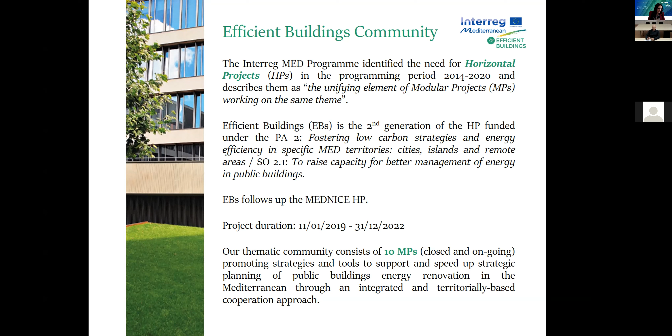Efficient Buildings Community follows up the MEDNICE horizontal project, the first generation of this type under the Interreg program. The duration of Efficient Buildings Community is from January 2019 until the end of 2022. Our thematic community consists of 10 modular projects, some closed and some ongoing, promoting strategies and tools to support and speed up strategic planning of public building energy renovation in the Mediterranean through an integrated and territorially based cooperation approach.

So what is our scope, what do we do in the Efficient Buildings Community? First, we support the communication activities and promotion of the modular projects in our community, the 10 projects mentioned before. We disseminate the modular project results on the theme of energy efficiency in public buildings. We organize events to create synergies among projects and identify opportunities. We increase the transferring and replication potential of results to other territories. We increase capacities of owners and managers of public buildings to design and implement better energy efficiency practices. Finally, we promote capitalization of the modular project results and our results at policy, national and EU level to influence public policies, taking into account the MED specificities.

Here you can see the Efficient Buildings Partnership and where you can find more information about our project. I was brief because it's more important to proceed with the presentations of our invited speakers.

So let me stop sharing my screen. Excuse me, my computer doesn't want to collaborate.

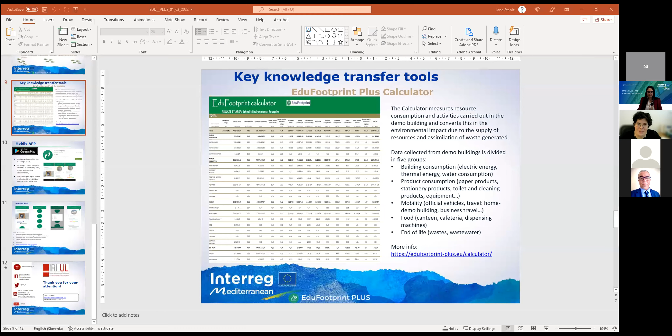We are also the energy management manager for University of Ljubljana buildings. This means we are trying to train the personnel towards being more energy efficient. We are monitoring the energy consumption of the buildings of Ljubljana University, which there are quite a lot of them. We're facilitating the energy information system, but most of all, we're trying to motivate end users to change habits in using energy.

In one of our previous projects, Mobistyle, we actually calculated how much energy we could save by using the stairs, not the elevator. So that was quite fun.

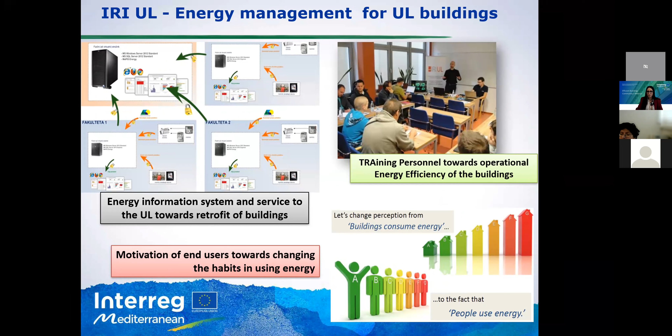But what we're trying to do is change the perception from buildings consume energy to the fact that actually people use energy. So we really need to focus on the people-faced approach.

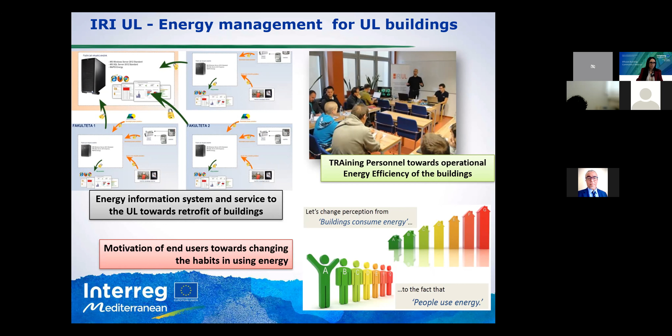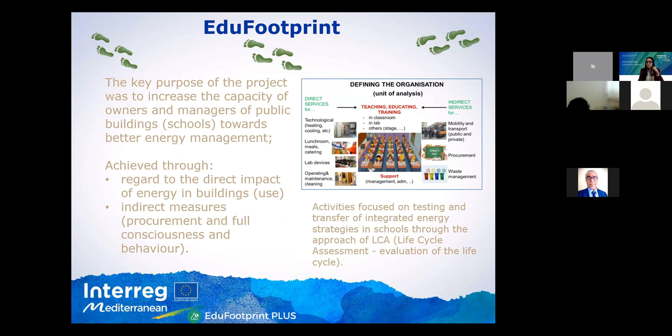In that light, we were first invited to the EduFootprint project, which was the original project. EduFootprint Plus's main aim is to transfer the tools and methodologies developed in the original EduFootprint project to new territories and new public buildings.

In the original EduFootprint project, we were focused mainly on school buildings. Now we are focusing on other public buildings, such as buildings for ministries, museums, kindergartens, or similar. The EduFootprint project intends to raise the capacity of owners and managers of public buildings and to promote low carbon footprints in schools and public buildings in the Mediterranean area.

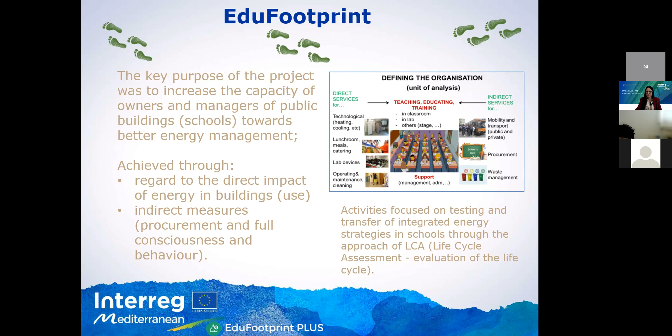Therefore, we are using different tools to do so. This is just a short scope on one of the measurements we took in the previous EduFootprint project.

The building in question is the new building for the University of Ljubljana chemistry faculty, and we could see how much the mobility or the energy consumption contributed to climate change. The pie chart shows CO2 kilograms and so on.

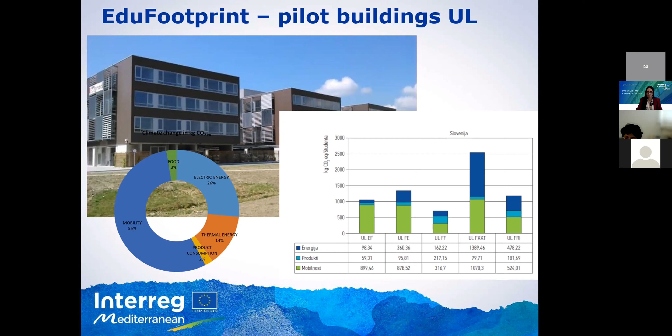However, because the results of the first EduFootprint project were so successful, we got funding for EduFootprint Plus, which transferred these results to new areas, such as Croatia, Bosnia and Herzegovina, Montenegro, and Albania.

Through the e-support system, we help them use the EduFootprint tools, such as the calculator and app. The receivers will, in kind, identify significant impact areas of public buildings and plan effective allocation of resources and time towards strategy, so as to decrease harm to the environment and people.

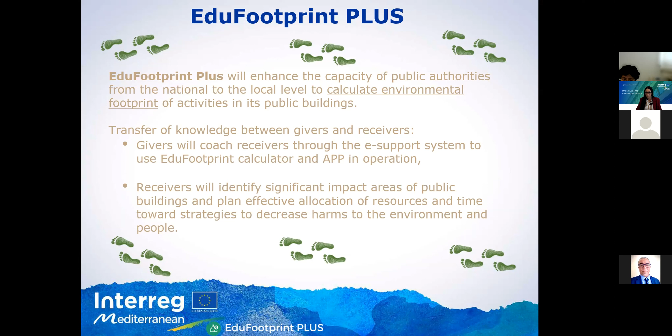Therefore, we created knowledge transfer tools, such as the calculator. The calculator is basically an Excel sheet, a tool to calculate the environmental footprint of public schools and public buildings.

The calculator covers energy consumption, product consumption, mobility, food, and waste. We input data like electric energy, thermal energy, water consumption, and electricity, including whether the electricity comes from nuclear plants, solar plants, or different types of plants.

The thermal energy is also similarly distributed, and the water consumption shows how much water is consumed by the building in general. We also pay attention to product consumption, such as paper products, stationery products, toilet paper, cleaning products, and so on. Everything is input in this calculator.

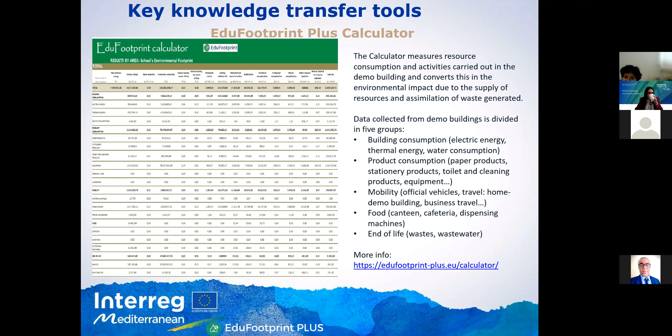For more information, you can access the web page in the presentation, and you can also download it and try it for yourself if you'd like.

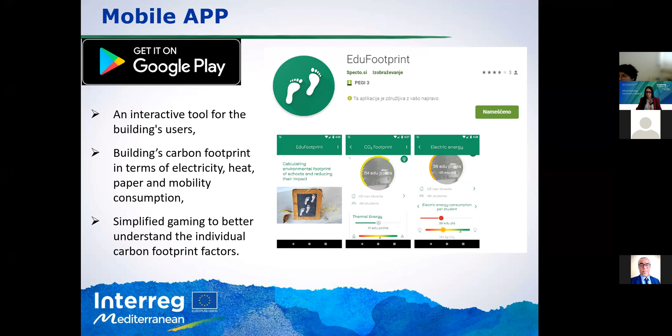However, the mobile app is an interactive tool for building users. It calculates the building's carbon footprint in terms of electricity, heat, paper, mobility, and so on. It also presents the so-called edu points, which you can play with by adjusting your carbon footprint data. So this is the mobile app.

It's available to download from the Google Play Store. However, at the moment it is limited to the EduFootprint Plus partners because we are still in the testing phase. But it should be available for the general public in the spring. So, what are the basic characteristics?

You have the basic data and logos about the EduFootprint project, the database about the demo buildings, and key CO2 footprint data. You also have the knowledge base, which includes all the static information and storytelling. And of course, you can play with EduFootprint, edu points, to decrease your building's CO2 footprint. You can find more information in the link provided.

And finally, there is the EduFootprint Plus webpage, where you can see all the tutorials about the project, the calculator, the mobile app, and very soon we'll also upload the EduKit.

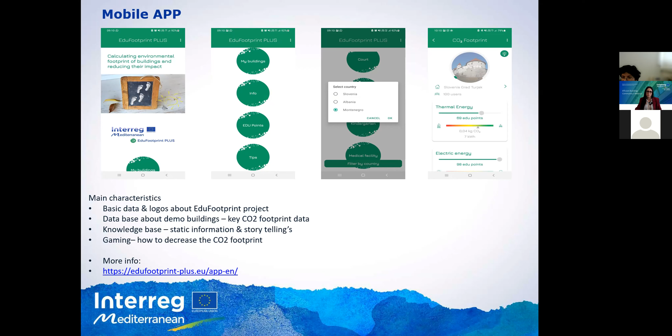This is very shortly a presentation about our project. However, if you have any other questions, please let me know. I'm available, so if you have anything else, please let me know. I'll stop there.

Thank you a lot, Jana, for this presentation. I have some questions, but I will keep them for the end of the webinar, which will have time also for questions from the audience.

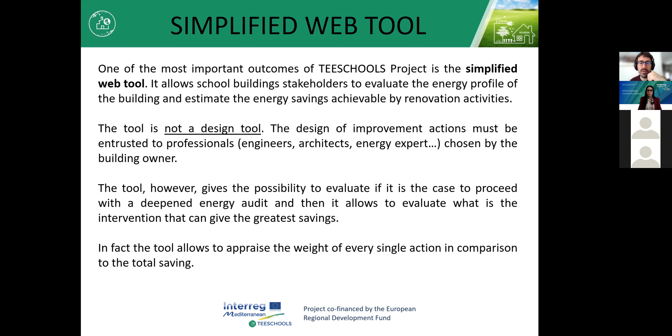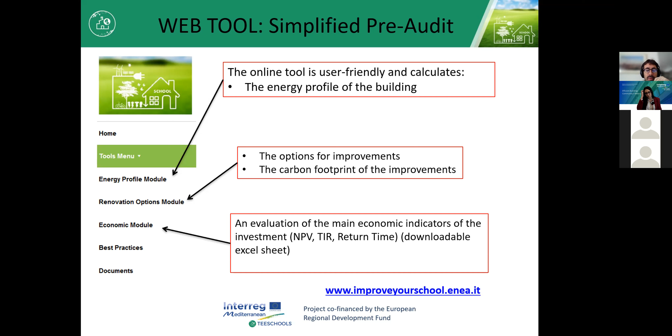Finally, the economic module gives an evaluation of the main economic indicators of the investment, so net present value, time of investment retirement, and so on. All this data can be downloaded in the format of PDF or Excel files.

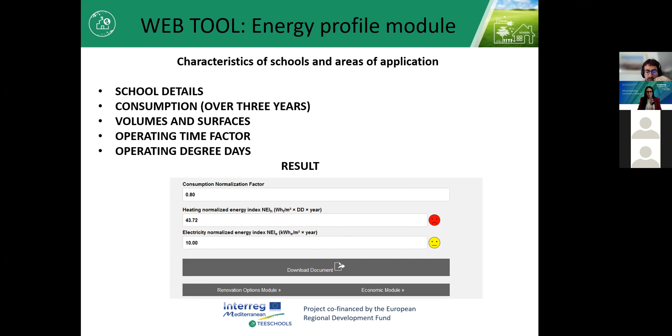Regarding the energy profile module, the user is asked to give as input the school details in terms of consumption over 3 years, volumes and surfaces, operating time factor, which is very important to assess energy consumption, and operating degree days, which take into account the location where the building is placed.

Finally, the total energy saved, in terms of both electric and thermal, can be achieved, as well as the CO2 equivalent savings and the school bus kilometers equivalent savings, in order to give the user an idea of what the renovation intervention has done.

The last module is the economic module, and it is given to the user in terms of an Excel file, where the main economic parameters can be seen, for example NPV, IRR, and so on, in order to calculate how many years of exercise are necessary to recover the investment done for the energy retrofit, basically.

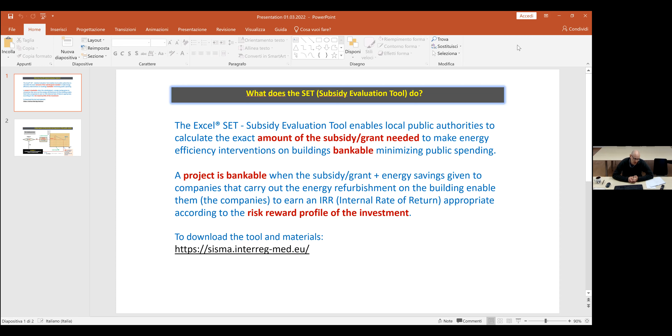So first of all, they said, okay, it was about 6 months ago, so the percentage is rather low. Why? Because the internal rate of return that banks owning ESCOs or companies usually want obviously depends on the risk reward profile of the investment.

What does this mean? That if you win a tender with a public authority and you know how to do your job and you do it well, it's not like working on the market where you have other kinds of risks. So obviously, the risks are far much lower than the average risk a company can incur when it has to operate on a market where maybe your clients may not pay you, the market can go up, can go down. So obviously, the risk is lower.

So let's say that on a basic standard approach, what do we say? Okay, these kinds of operations, these kinds of investments require at least 15, 20 years of savings that have to be given to the company. Okay, so let's say a public-private partnership, besides the grant, obviously, on top of the grant.

So the interesting thing is, considering that the risk is really low, what we can do is basically consider the average interest rate on public debt, on bonds that citizens own. Citizens finance their country by buying long-term bonds, which have an interest rate that's obviously very, very low. Like in Italy, it used to be around 0%.

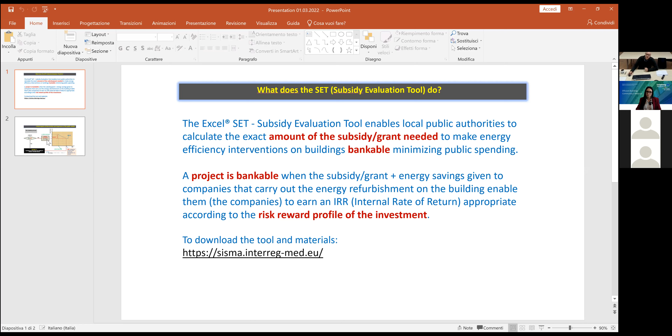Okay, so this is a scheme, and then we'll go through the Excel file, but just to give you a general idea. The subsidy process basically is: once we've worked out what the minimum internal rate of return required by the market is - generally what governmental bonds yield plus 3.5% - when you add a couple of phone calls, that's how you get to know it, how you fix it, and you say it's about 4.5%, 5%.

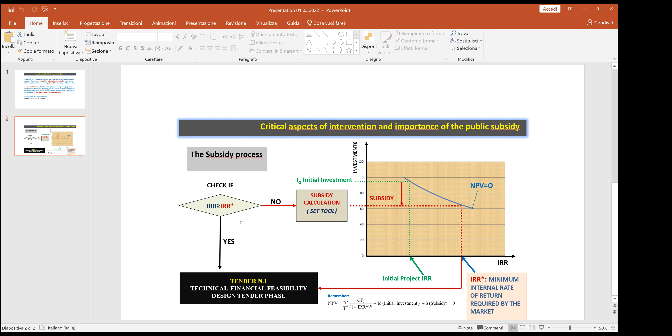Excellent. So if your internal rate of return, considering a set of energy efficiency measures - envelope, glazing, boiler, behavioral, whatever it is, doesn't matter - with the Excel file you can calculate the internal rate of return. Once calculated, if the internal rate of return from the savings is higher than what the market wants, you don't need a subsidy, because how do we calculate this? By simply discounting all the savings, let's say over 20 years, that this energy efficiency investment will generate.

Now, this is obviously on a theoretical level. So if the savings are so good that you don't need a subsidy or grant, because the savings are enough to ensure that the companies doing this - let's say an ESCO or even a building construction company carrying out the investment and cashing in all the predefined savings - will get an internal rate of return larger than the minimum required by the market, they don't need a subsidy.

But the thing is, in this situation you can carry on to the tender - you issue your tender number one and carry on with your work. But this is practically impossible. This never happens.

Especially over here in the Mediterranean area, in our area, it's technically nearly impossible. Why? Because this can work in countries like, I don't know, Estonia, with cold weather, buildings that were built during the Soviet era. And what kind of buildings were they? Enormous, huge buildings with a very regular geometric form, based on the idea that gas was free, therefore with terrible windows, basically no insulation, envelope was not existing. It's obvious that if you carry out a certain kind of energy refurbishment on the envelope and the glazing system, in those conditions, yes, probably you can make it. But in other realities, like especially the Mediterranean areas, these things do not work.

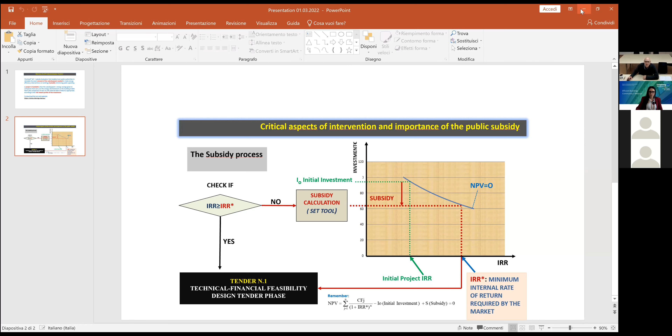Now, let's see if over here. Okay, sorry, here. You see it now? Yes, now.

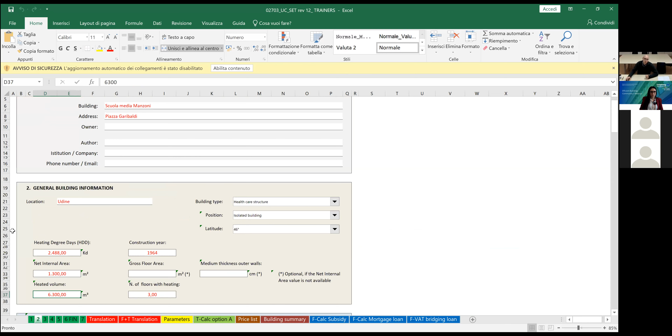So as I said, first thing you select the language. I'll put it on English. Then what you do, and this is also similar to the pre-audit file, the web one presented by Anea before, basically there's a section where you fill in, obviously we're speaking about, in this case, a school.

The language, okay, right. So you write down the school, the address, general data regarding the school. Then, as you can see here, we've got different kinds of options. What we will choose is school, okay?

So what we have to do here is fill in, for example, the construction year, because obviously this is also a pre-audit model. Basically, what we've done is we've worked out standard building technical characteristics of buildings based on the construction year in our region, considering what the kind of materials were and what the average geometrical status of the school is.

And by the way, we've also tested this Excel. In other words, we carried out a precise energy audit of 20 schools for another kind of work we've done before. And once we finished this Excel file, we tested the file with the real audits we've done. On an average basis, it's okay.

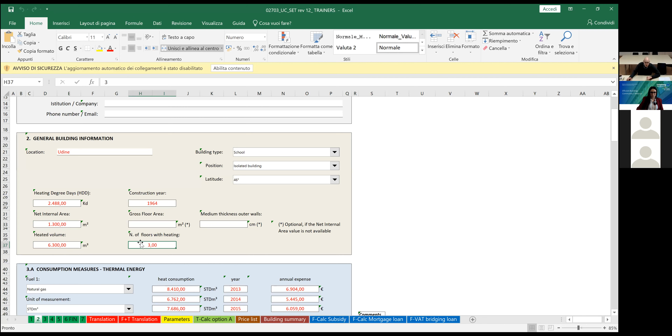So anyway, construction year, heating degree days, which depends on where the school is located. And then we have to fill in basic data like the net internal area, the heated volume, and the number of floors, okay? Another aspect which is important is regarding the heat consumption.

So in this case, like in our case, we use gas, so you can choose several kinds of energy vectors. What we work basically on, in our case, unfortunately, is gas. And this is the data. So we need to know, it would be better to have the last 3 years of consumption.

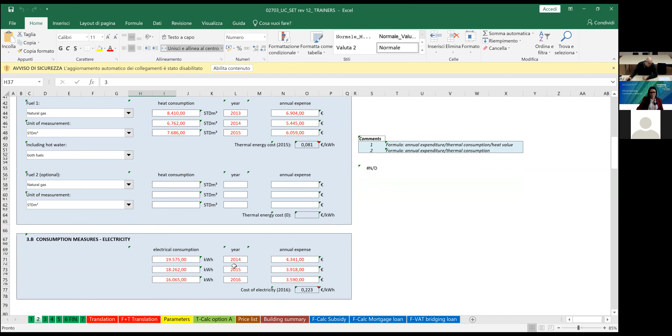And then there's another module which is dedicated to the consumption of electricity measures, so you have to fill that in. So we need, as you can see, some basic data. Otherwise, this cannot be done.

And at this point, what do we do? We consider, first of all, what kind of option we will be using, what I call option A, a simplified estimation, a pre-audit, you can put it this way. There's also option B, if you have already carried out an audit.

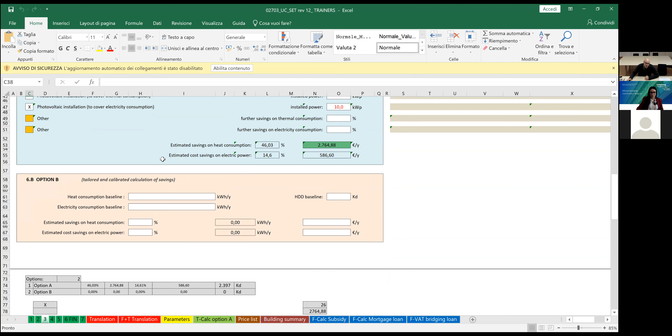In this case, you just go down at the end of the sheet and fill in the data here. But we've put this as an option, it's not important for us. What really is important is option A. We are interested in pre-auditing, in estimations.

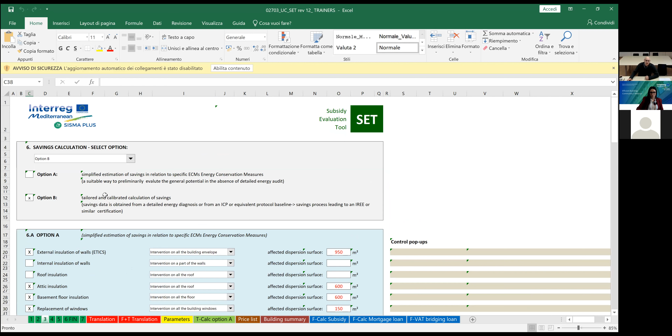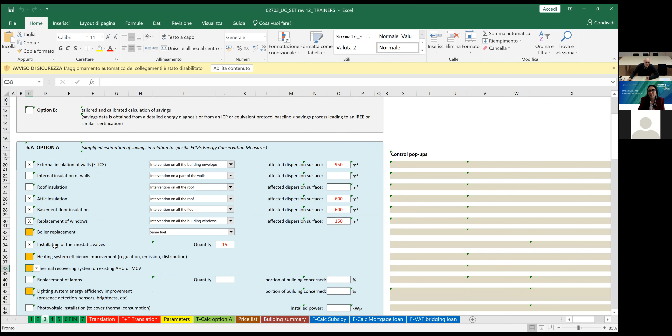So as you can see, I don't know if you can see it, but anyway, over here, we can choose a certain amount of energy measures. Like external insulation of walls, internal insulation of walls, roof insulation, attic insulation, basement insulation, replacement of windows, boiler replacement, installation of thermostatic valves, heating system efficiency improvement, and so on.

Excuse me, Stefano, because the time is running out. If you can proceed to the results tab. I'll do it very quick.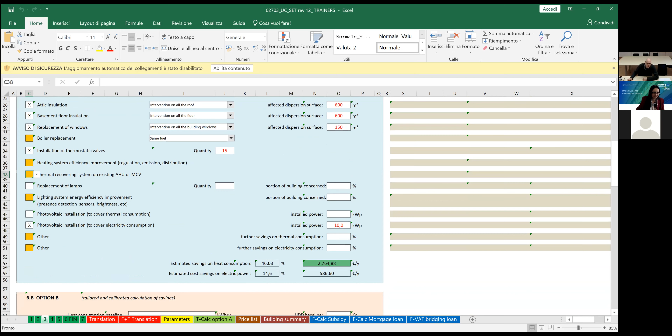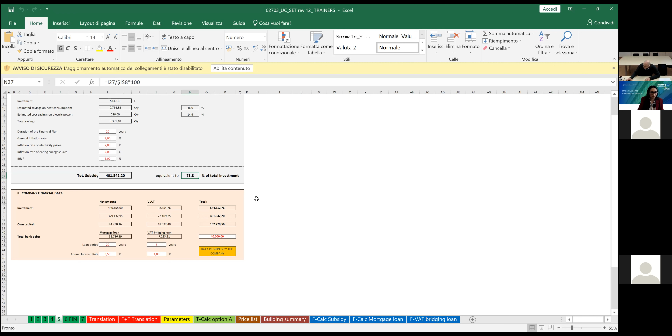Once you've done all this, you can calculate what the savings are, and it will also calculate what the subsidy is in money and in percentage. So in this case, the subsidy needed is 73%, in order to make this investment bankable within a public-private partnership. So this is it, very briefly.

And as you can see, the percentage required, the grant compared to investment, is in this case 73%, but usually it's around 70 to 80%. It's very high because, as I said before, energy efficiency measures are very expensive, and unfortunately they produce savings which are not that high.

Thank you very much, Stefano. During your presentation, I was wondering which are the cases where savings are so good that no subsidy is needed, but you answered that... They don't exist, yeah, very rare. Okay, thank you very much.

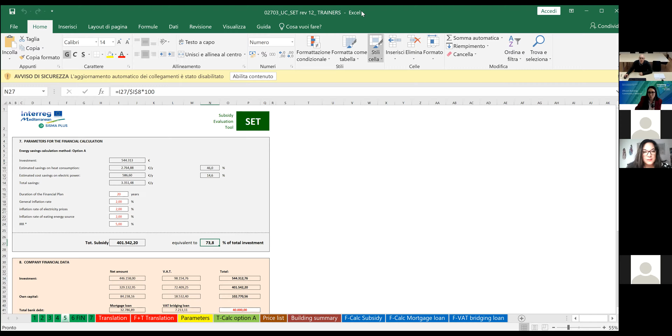Thank you all for having me here today. I'm an electrical engineer, part of the SEM Lab team at the University of Western Macedonia. The University of Western Macedonia here in Greece is a university which is very sensitive in issues of energy refurbishment of buildings. It has the aim of becoming the first university in Greece where all its buildings will be nearly zero energy buildings. About the schools, I will share my screen.

Okay, can you see it? Yes. Okay.

The field of energy saving, as well as the protection of the environment, is a priority of the European Union. More specifically, I would stress that energy saving in buildings through the building renovation wave is an area with a strong developmental dimension that combines the strengthening of national economies with the protection of the environment.

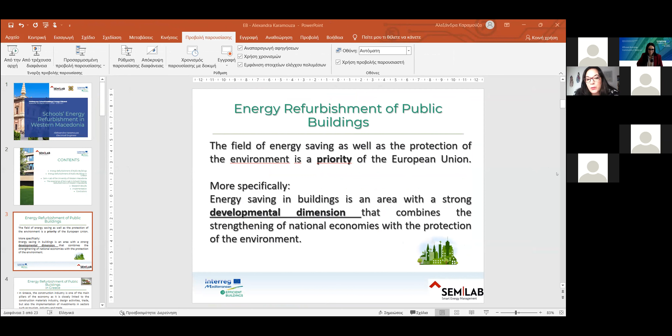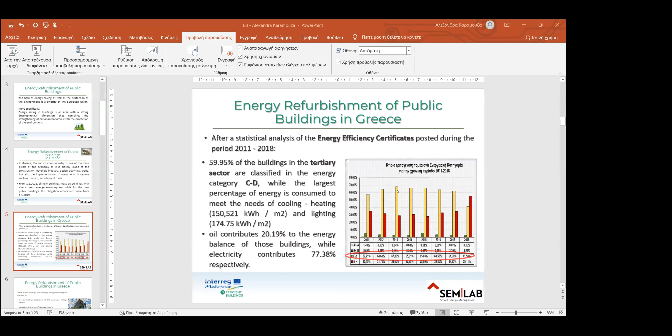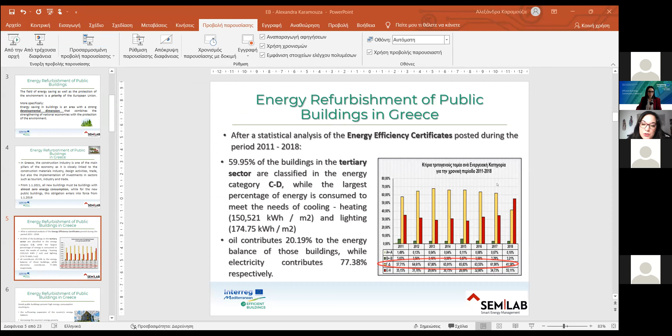After a statistical analysis of the energy efficiency certificates posted between 2011 and 2018, nearly 60% of the buildings in the tertiary sector in Greece are classified in the energy category C and D, while the largest percentage of energy is consumed to meet the needs of cooling, heating, and lighting in those buildings. Oil contributes almost 20% to the energy balance, while electricity contributes 77% respectively.

The Greek public buildings present high energy consumption, resulting in the suffocating expansion of the country's energy balance, increasing the country's energy poverty. The vast majority of public buildings in Greece were built before 1980 and are not heat insulated, so they require very large amounts of energy to ensure acceptable comfort conditions in the winter.

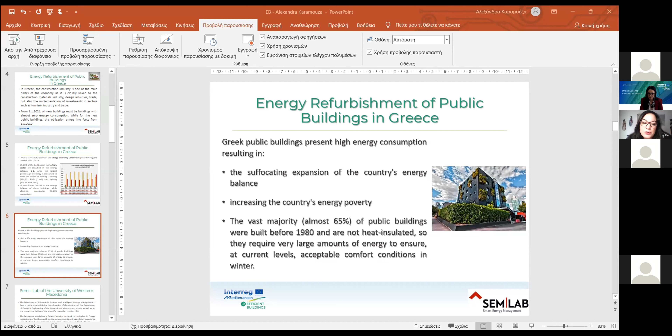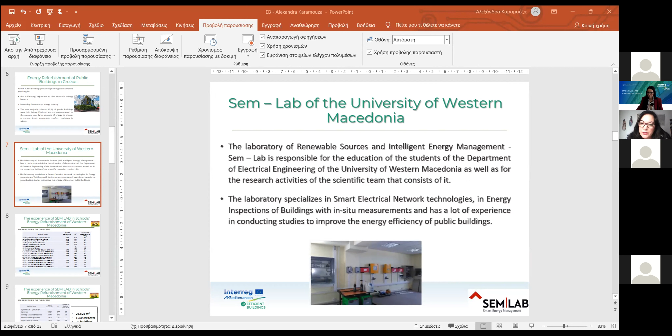The Laboratory of Renewable Energy Sources and Intelligent Energy Management, SEMLAB, of the University of Western Macedonia, is responsible for the education of students of the Department of Electrical Engineering, as well as for the research activities of the scientific team. The laboratory specializes in smart electrical network technologies, in energy inspections of buildings with in situ measurements, and has a lot of experience conducting studies to improve the energy efficiency of public buildings.

More specifically, concerning the school buildings in the region of Western Macedonia, the SEM Lab has conducted several studies for the energy refurbishment of many school buildings.

At the prefecture of Grevena, we have conducted energy refurbishment studies for 22 buildings. We are talking about 25,428 square meters, with approximately 2,000 students at those schools: primary schools, kindergartens, middle schools, and high schools.

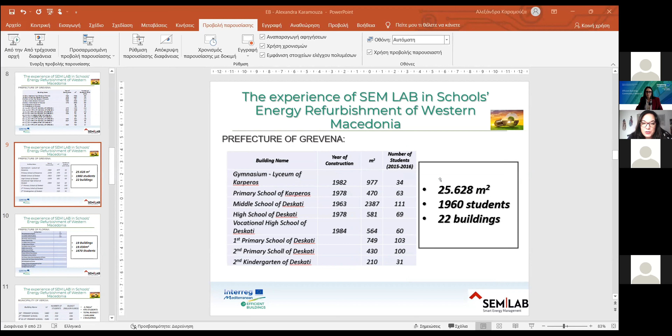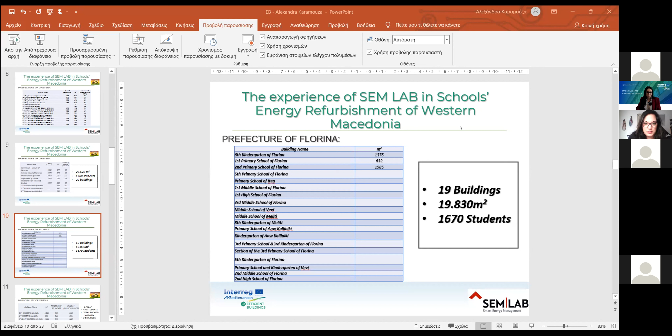At the prefecture of Florina, here in Western Macedonia, we have conducted energy refurbishment studies for 19 buildings. At the municipality of Veroia, we have conducted energy refurbishment studies for 3 school buildings.

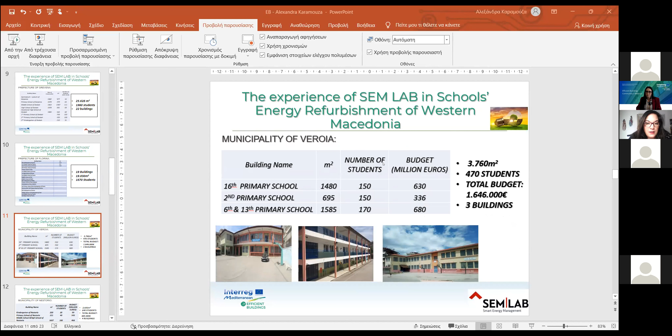The total budget is 1,646,000 euros for those buildings. We can see the square meters and the number of students. The more recent studies we have conducted were for 4 school buildings of the municipality of Nestorio at Kastoria.

All the above energy upgrade projects were approved for financing by ESPA and by financing programs of the region of Western Macedonia. The selection of those programs for funding depended on the budget of the project in relation to the energy reduction that the project will produce in the building after the refurbishment.

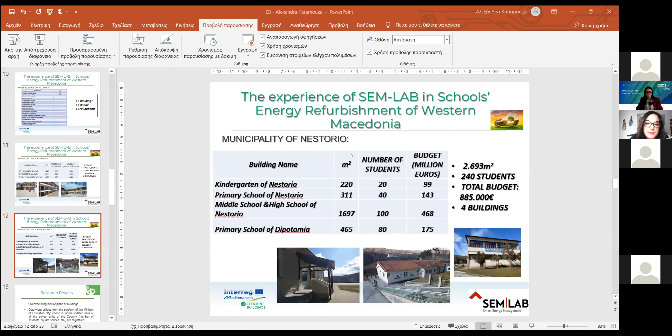The first major problem our team encountered in trying to complete the studies was the overwhelming lack of plans of the buildings, as well as the lack of information on the plans following changes that occurred during the operation of the school buildings. This led us to utilize data from the platform of the Ministry of Education, MySchool, in which updated data of all the school units of the country are registered.

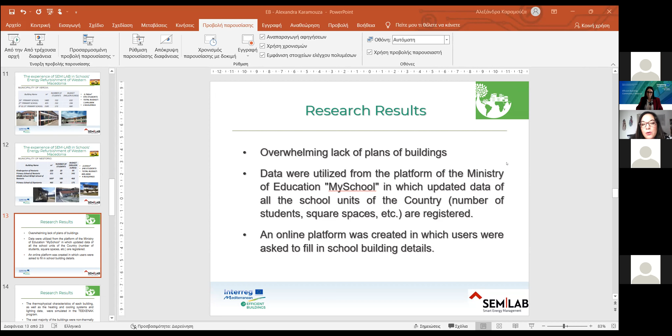Furthermore, an online platform was created in which users, most commonly the school principals, were asked to fill in school building details. After that, and after on-site visits in every building, the thermophysical characteristics of each building, as well as the heating and cooling systems and lighting data, were simulated in the TEEKENAK program. This program is created by the Technical Chamber of Greece for the simulation of the energy classification of buildings.

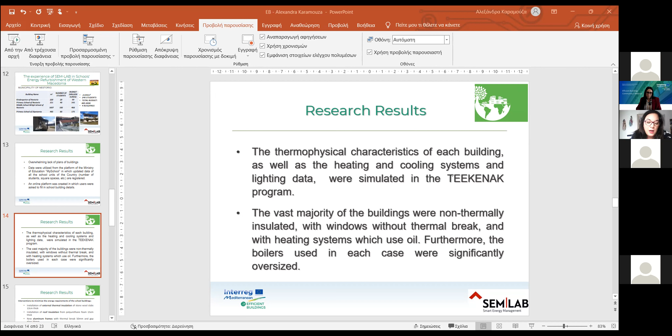The vast majority of the school buildings were non-thermally insulated, with windows without thermal break and with heating systems which use oil. Furthermore, the boilers used in each case were significantly oversized.

Each school building was treated separately and according to its own needs. But in general, the interventions used to minimize the energy requirements of the building included installation of external thermal insulation, installation of roof insulation, new aluminum frames with thermal break, installation of air-water heat pumps, installation of LED luminaires, and installation of a new central heating and cooling distribution system at each school.

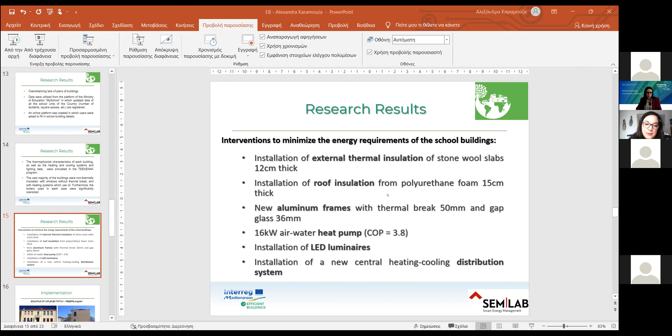The schools in the regions of Grevena, Florina, and Veroia are in the phase of completion of the projects by the builders. In the coming months, they will be delivered completed, and most likely in the next school year, they will operate energy upgraded.

The school buildings of Nestorio are in the phase of the tender of the project and the submission of bids by the contractors. Here we have an example of the implementation of the energy refurbishment of a school building: the primary school of Lemos, of the municipality of Prespa.

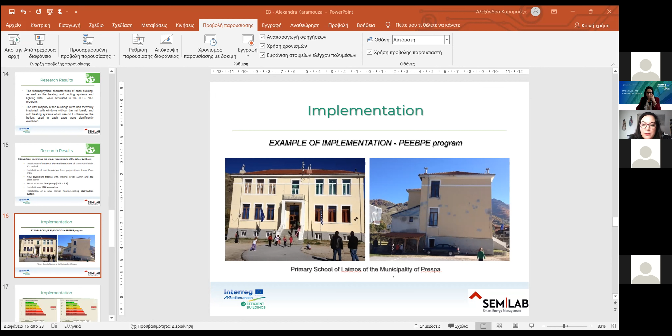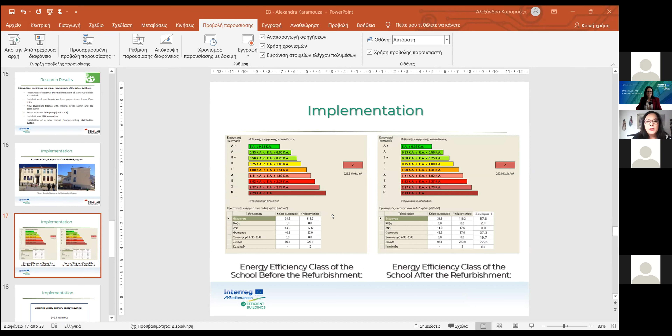The energy efficiency class of the school before the refurbishment was Z, and after the refurbishment, its energy efficiency class was B+. The expected yearly primary energy savings was 146.4 kilowatt hours per square meter, or 65% energy saving.

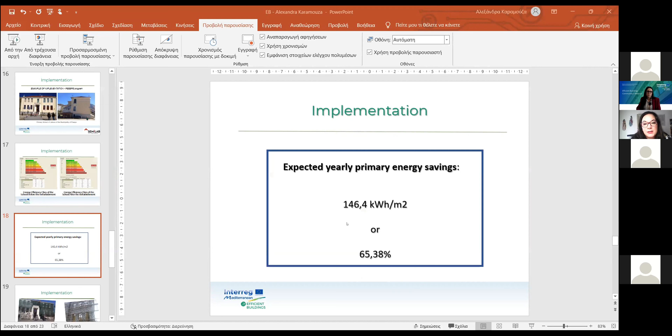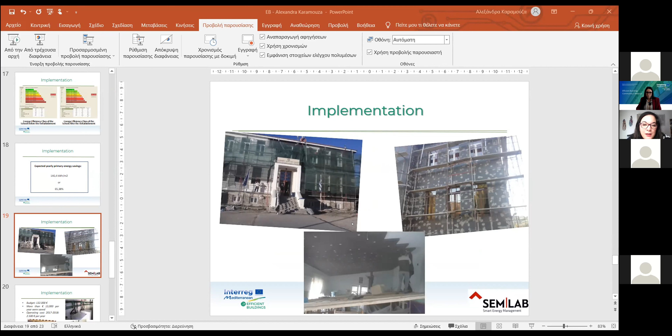Here we can see some photos of the energy refurbishment of the building: installation of external thermal insulation, installation of roof insulation on the building, installation of air-water heat pumps, and the new heating distribution system for the building.

The budget was 132,000 euros. More than 13,000 euros per year were saved. The project finished in 2016, and the operating cost of the school in 2017-2018 was 2,500 euros that year. It was dramatically lower than the operating cost before the energy upgrade, according to the school building manager.

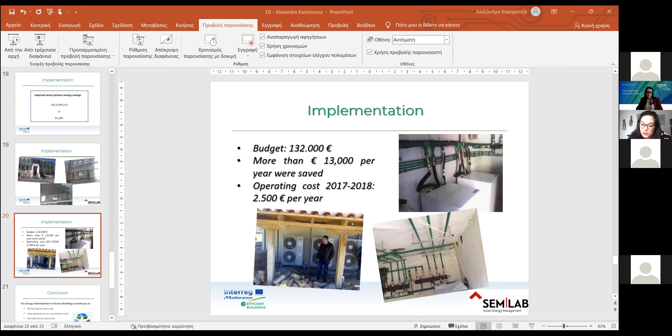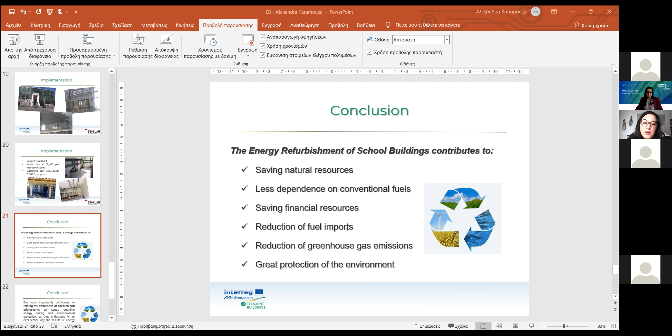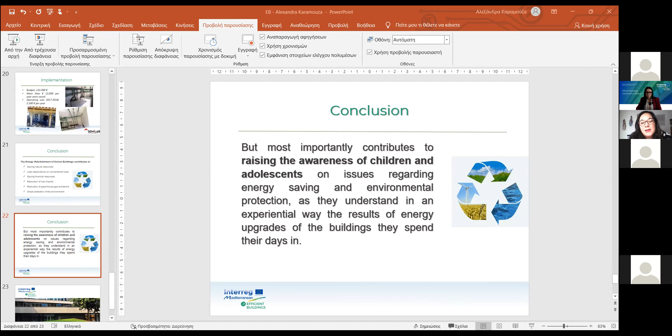The energy refurbishment of school buildings contributes to saving natural resources, less dependence on conventional fuels, saving financial resources, reduction of fuel imports, reduction of greenhouse gas emissions, great protection of the environment, and most importantly, contributes to raising awareness of children and adolescents on issues regarding energy saving and environmental protection, as they understand in an experiential way the results of energy upgrades of the buildings they spend their days in.